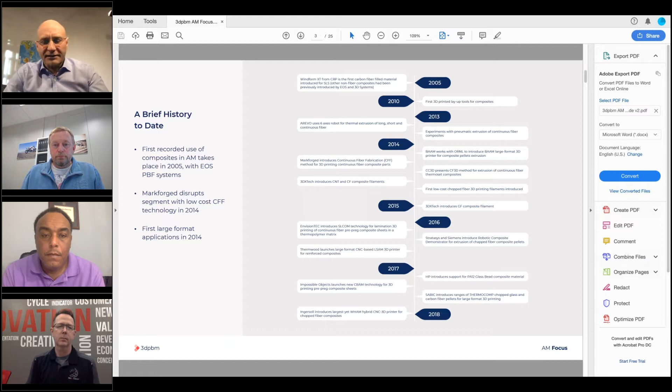A very quick view at the timeline for adoption. The main points are that through 2019, the market is almost entirely based on chopped fibers for material extrusion and powder bed fusion technologies. We believe that through 2022, we will see greater adoption of large format and pellet-based extrusion technologies for very large applications, meaning a lot more material consumption. And then we don't expect to see continuous fiber applications in additive manufacturing until after 2023.

This is to give you an idea of the overall market forecast. The main segments are hardware and parts. Material is a smaller segment. It's very interesting, but the point here is that the value is in the composite additive manufactured parts. That's where a lot of the added value is.

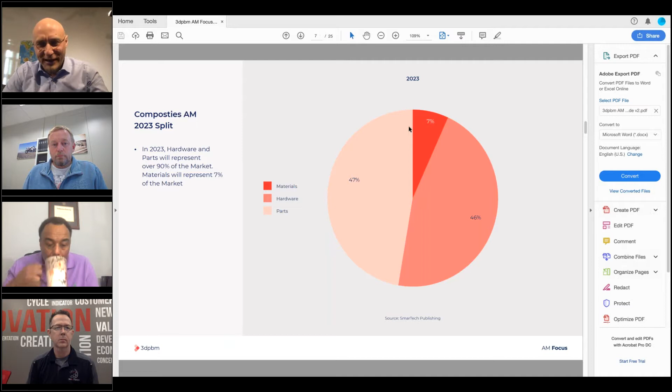As far as the hardware, these are the technologies we see as most highly relevant. Filament extrusion is most commercially relevant, such as what we're going to hear from Matt at 3DX Tech. Robotic extrusion, as we're going to hear from Arevo Labs, and the CFF from Markforged is quite relevant. Large format technologies using pellets are very relevant, and powder bed fusion technologies, including Multi Jet Fusion from HP, which only uses glass bead composites at this time, is also interesting because of the high productivity rates.

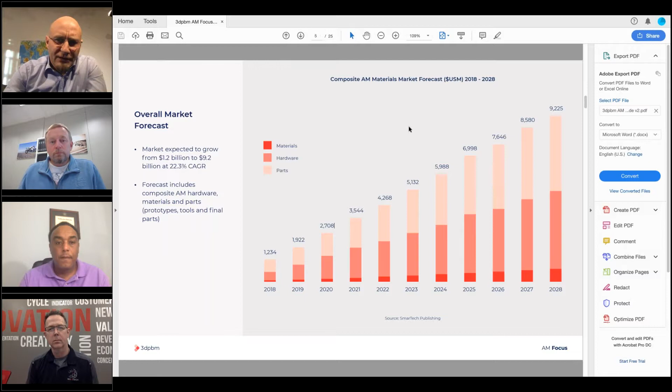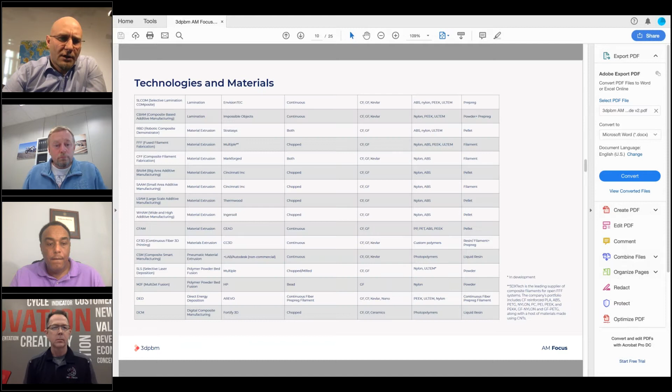This is once again the overall market forecast. Let me just go on to... so this is just the technologies, and okay, so let's look at the hardware for one second.

As you will see in this chart, by far the most important revenue opportunities are represented by polymer powder bed fusion technologies, but we have to specify that this includes all powder bed fusion machines, because there are no dedicated powder bed fusion systems for composites. So it was difficult for us to split. While there are filament extrusion dedicated systems, there are not that many powder bed fusion dedicated systems - in fact there aren't any. So this includes all powder bed fusion systems.

We do expect that powder bed fusion systems will become very important adopters of composite powder materials.

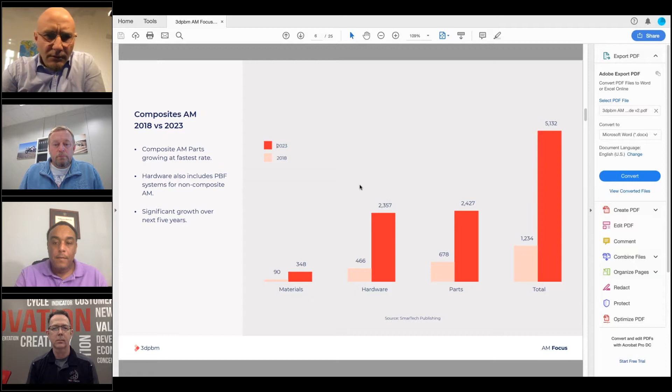Sorry, I don't understand why this is going back. Okay. So...

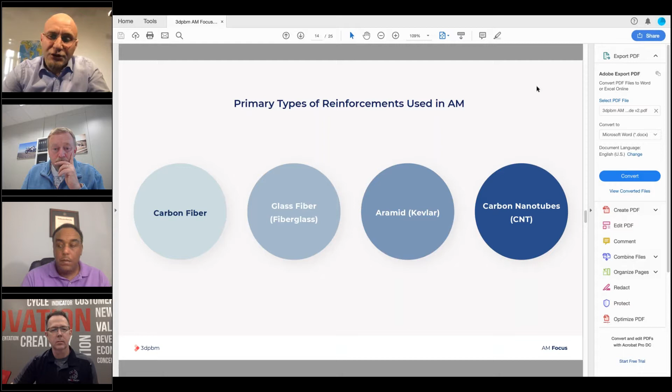So which materials are we talking about? In particular, the primary reinforcements used in additive manufacturing are carbon fiber, glass fiber (known as fiberglass), some cases of aramid fibers like Kevlar, and carbon nanotubes. These are the materials that we believe have the most commercial opportunities available.

How are these materials split? This report focuses specifically on chopped fiber composite materials for thermal extrusion and laser fusion, so powder bed fusion technologies. There are some cases of thermosets being used in additive manufacturing, but those are mostly experimental technologies without a very relevant commercial application at this time.

I think the most interesting segment as far as variety of materials available is material extrusion, where we see materials being used both in the form of pellets and filaments. In both cases, they can be reinforced with carbon fiber, glass fiber, and carbon nanotubes. We see cases of this being commercially available. We also have a number of plastics being used, ranging from ABS and nylon - more basic plastics - to now increasing use of high performance plastics such as Ultem and PEEK.

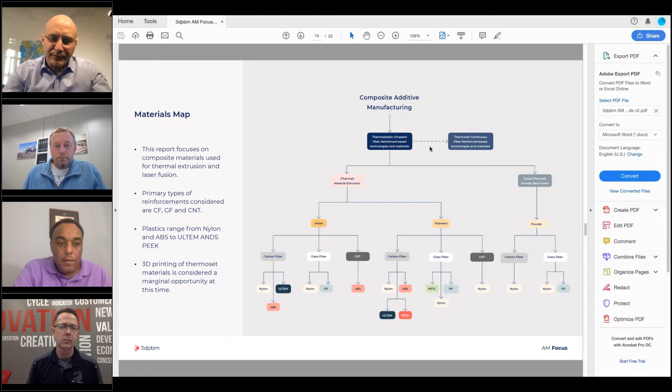In laser fusion technologies, we see mostly powders as the support material, and there are a lot of examples of carbon fiber and glass fiber being used in powder bed fusion, almost exclusively with nylon. We've also indicated some polypropylene being used, and there are reports of other more high performance materials that will be used in powder bed fusion as well.

This is the split. We do expect that pellets will be the most common support because of the high throughput capabilities of large format technologies which use composite pellets, and because of the specific benefits that composites bring to large format 3D printing. Filaments are a smaller segment because it's a slower technology, and powders is quite a significant segment because it's much more established in the market today.

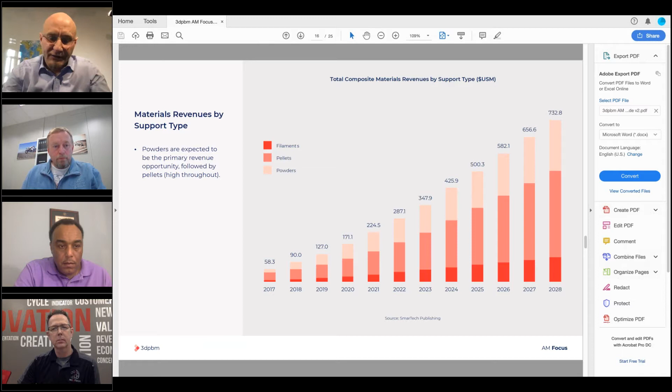This gives an idea of our forecasted CAGR for each material type. The most growth is expected in filaments and pellets, while powders is a more consolidated segment.

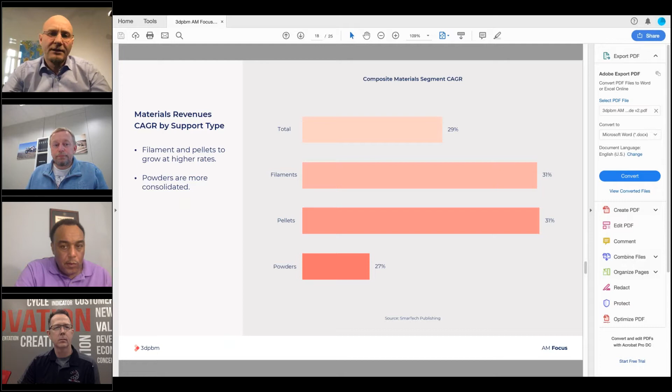This is the adoption segments, which is also quite interesting. Automotive and aerospace are the most interesting single adoption segments, but the other industry segment is a lot bigger. This includes energy adopters like oil and gas, and marine adopters - companies that use very large parts. The larger part capabilities that we're starting to see using composite materials will bring increasing use from these adoption segments.

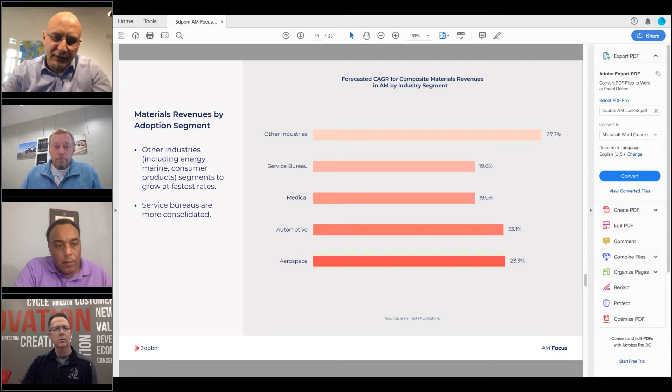In this report, we also took a closer look at 3D printed parts. Composite AM parts are expected to be a very significant revenue generator - we expect them to grow into a $4 billion yearly revenue opportunity.

Final parts are expected to become the most significant segment. Today prototypes and tools are more significant in terms of revenues than final parts, but we expect that by the end of the forecast period, and even before, final parts will become the most important segment because of much higher numbers - reaching 1.8 billion dollars.

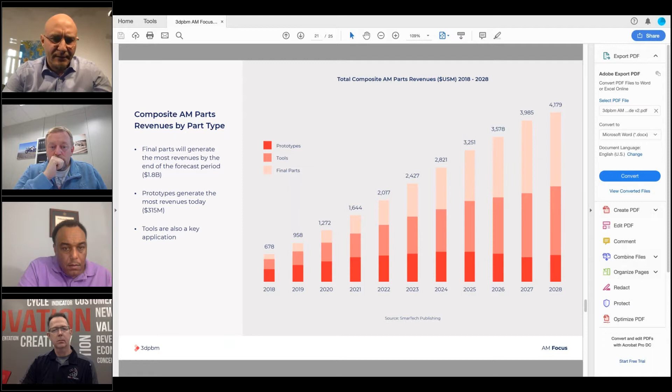Prototypes are the biggest segment today. We estimate they're worth about 300 million worldwide.

This is also a more in-depth analysis of the parts - the types we considered: small, medium and large prototypes. For each part type we considered a different size to make our calculations.

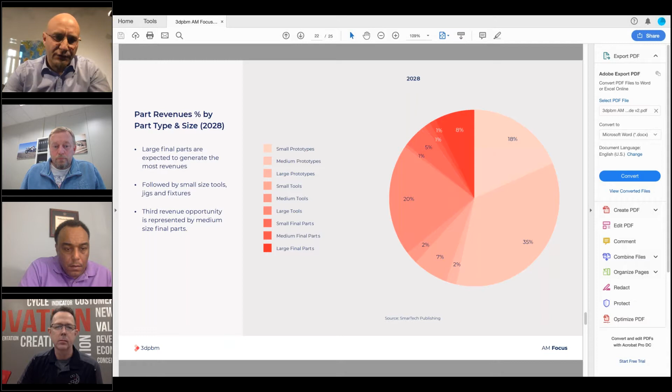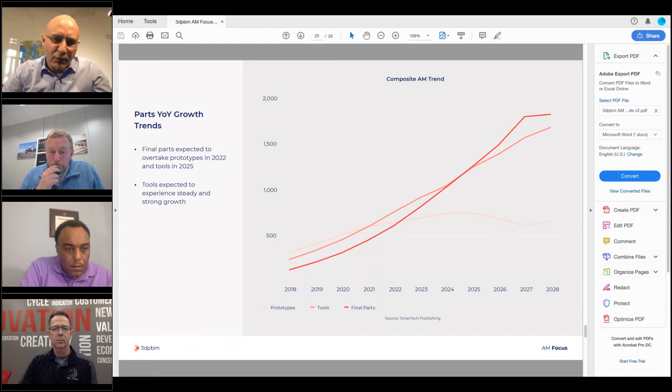One last chart to highlight growth: final parts are expected to overtake prototypes around 2022 to become the most important revenue segment. Final parts are expected to have the highest growth rate at 30%, followed by tools, which we believe will be a very important opportunity for composites because of several cases we're observing now.

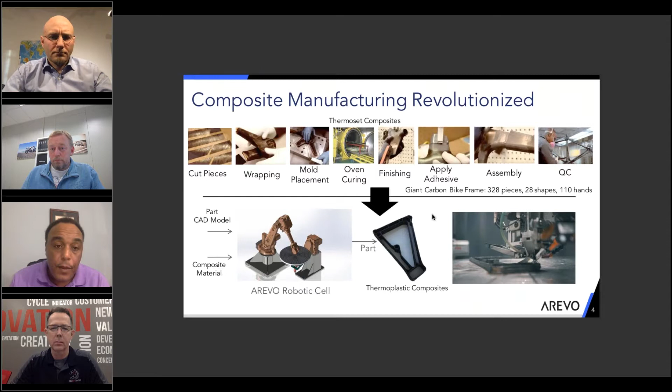So AREVO's approach is software, materials, and robotics. Our workflow starts with the software, which takes a digital design, analyzes it, and looks for strengths and ways to reduce the weight of the structure. It does an analysis we call additive finite element analysis, or FEA. We threw away the traditional laminate theory approach used to make composites and tailored the approach for additive.

Every single fiber is oriented to get the desired material property. We're able to predict, simulate, and optimize the material and fibers to get maximum performance. The composite materials are also optimized for this process. Today we're using a thermoplastic and continuous carbon fiber.

The robotics platform is based on what we call DED, direct energy deposition, which employs a laser that melts the incoming filament and the substrate below, applying appropriate pressure to produce in situ consolidation. Our properties are comparable to autoclave properties common today with composites, and the subsequent properties are 5x the strength and 1/3 the weight of titanium.

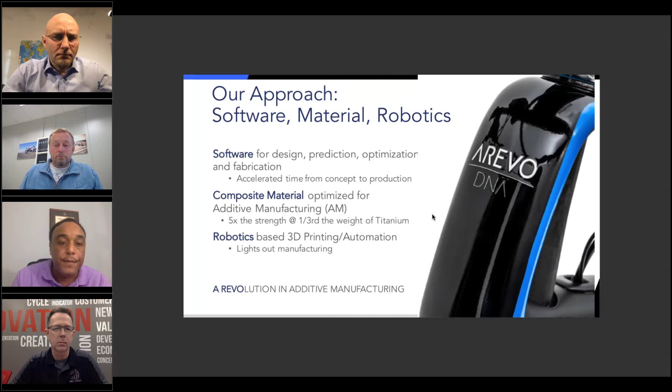Our manufacturing approach is really revolutionizing the way composites are done today. As I mentioned earlier, composites are very labor intensive to produce in the traditional method. With AREVO's manufacturing cell, we consider it a lights-out operation, a factory-in-a-box philosophy.

We take an AREVO robotic cell and integrate it with quality control. As we lay down every single layer, a digital image, a digital twin of every single layer, is created to build a representation of the part that we're able to simulate, understand, iterate, and continue to improve.

This is new for composites, new for aerospace and automotive parts. Today, you traditionally have to take a finished part and go through some sort of X-ray to understand residual stresses and micro cracks that may be present. With our approach, we're capturing this data during the buildup of the part.

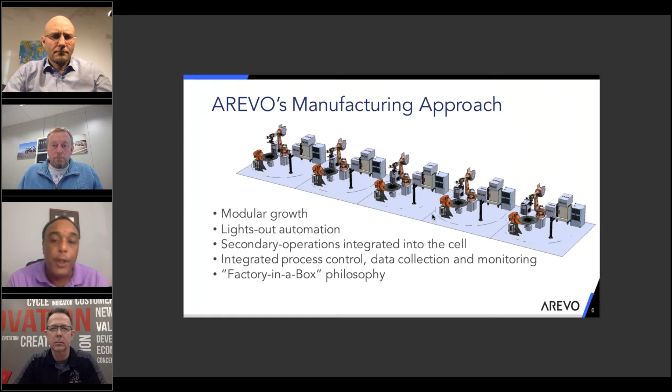The benefits of this approach are a strength to weight ratio comparable to high performance metals—lighter and stronger—at a quarter of the cost of traditional composites.

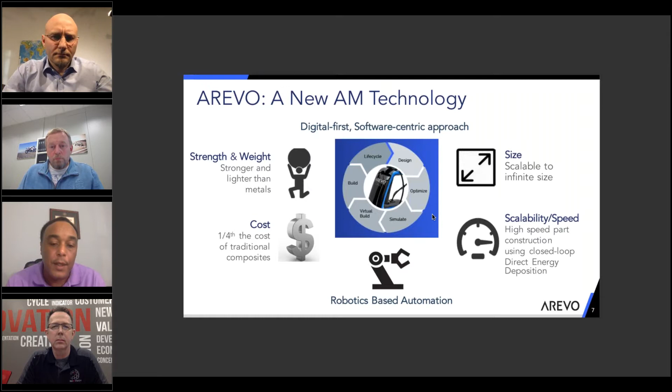When you look at the build envelope of large format composite systems, our approach is very scalable. As you need a larger part, you can essentially put a robot on a gantry. Since we're robotics based, it's an infinite build volume, and from a deposition throughput standpoint, we're much faster than any commercial FDM-based extrusion system. This is key to enabling new business models and going after applications that weren't possible before.

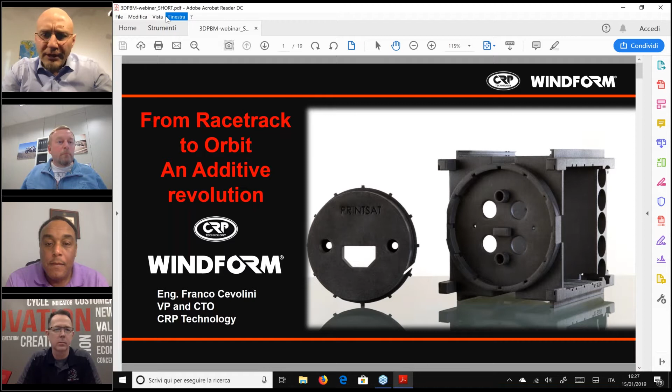Yes. Okay, so I will speak about the use of Windform materials in CRP technologies. As you can see here, it's something that started with the racing application and now is also available for aerospace application.

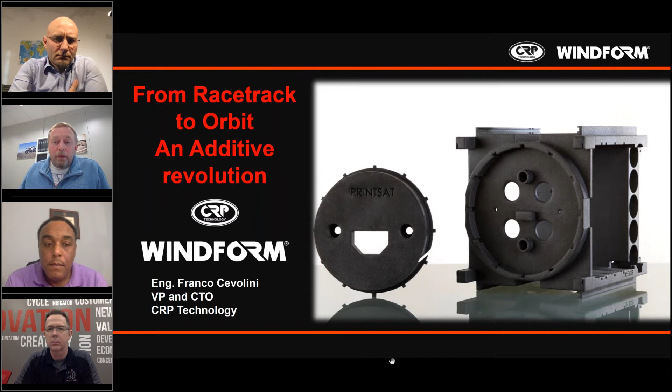As I said before, we started with motorsport because of where we are located. We are located in Modena, the motorsport Italian Valley. So a lot of application started with this final application, this final market in mind. But then after the motorsports, we were able to...

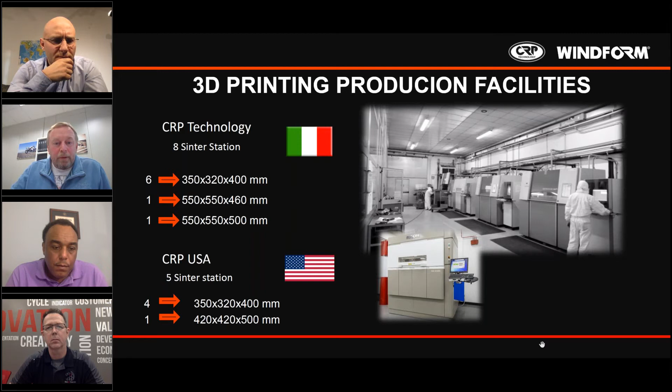What is important to highlight is that using the Windform material, we were able to go from rapid prototyping to additive manufacturing. In fact, with these materials, we are now able not only to produce functional prototypes, but also final parts. So now we can call this a real manufacturing technology.

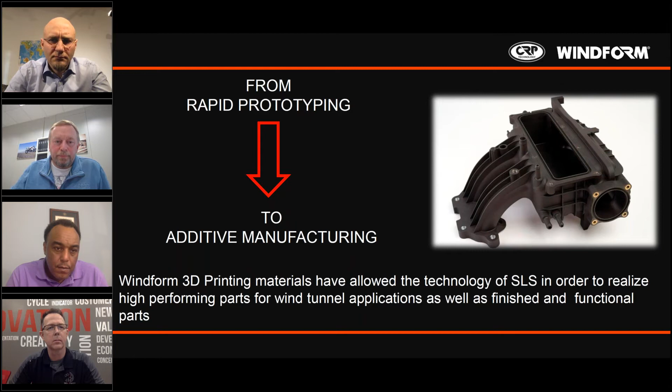We started in 2005 with the first release of Windform XT, a nylon-based material reinforced with short carbon fibers. After 10 years, we released a second version, Windform XT 2.0, again a nylon-based material reinforced with carbon fibers, where we were able to improve the mechanical properties and also the thermal properties, which were already quite high.

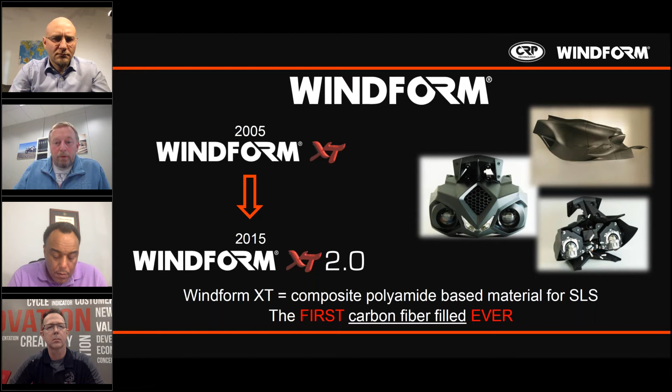Now we also have another version of carbon fiber reinforced material, the Windform SP. In this case, we preferred to improve the toughness and resistance, and this material is also waterproof, so it's used for applications where it's very important to have resistance to liquid and gas.

These are the two top-level materials. As you can see, we have a very high tensile strength and also a very high tensile modulus, which is very useful. And we are talking about a very light material, because the density is close to 1.1.

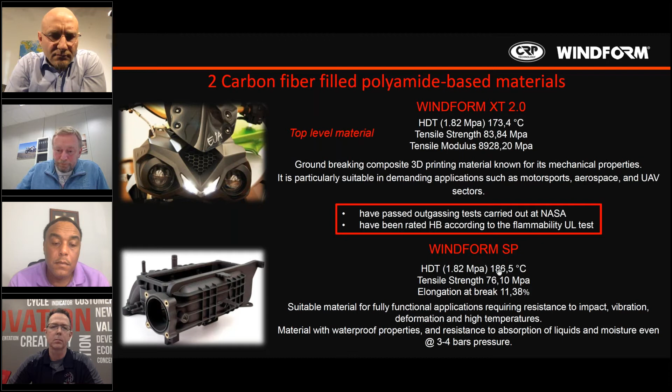Now we also have two versions reinforced with glass fibers. This is quite unusual, because normally glass as a reinforcement for SLS technology is used in the form of beads, not fibers. But with this choice, we were able to improve the mechanical properties, and also the thermal resistance of the material. Most importantly, talking about electric applications, these materials are insulating, so we have no electric conduction.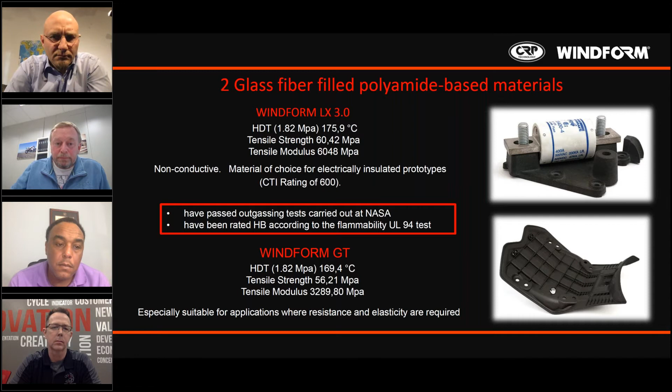This is what I have already said. It's important to underline that all the bikes will be Energica bikes, and we were selected among other big names in the motorbike scenario.

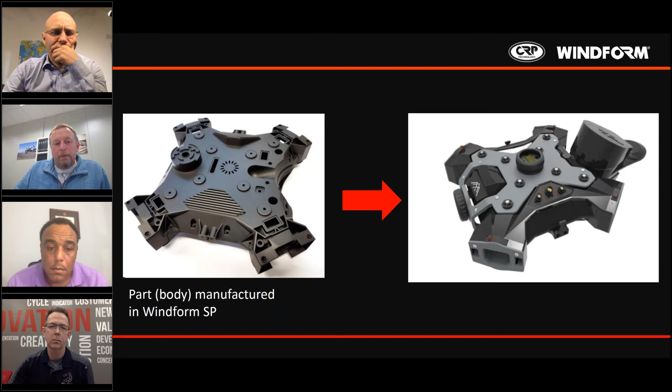Here, a very nice project that we have done one year ago. This is a drone that is completely done using Windform XT, Windform SP, and also other types of Windform material. This is the main body, so the frame of the drone. These are the arms that are manufactured in Windform XT 2.0.

The body is in Windform SP. So again, we are able to select the right material in order to take the most advantage for the final part.

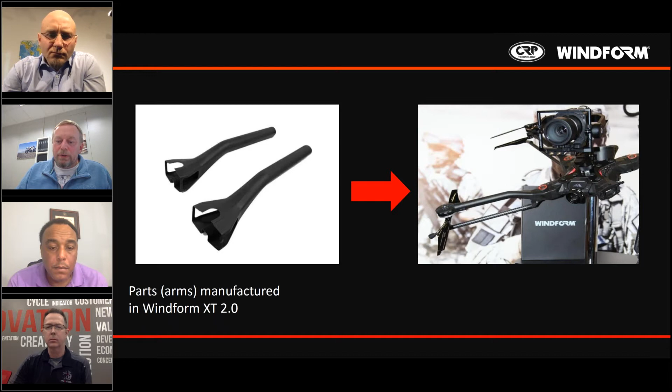And this is another very interesting application. Here we are talking about aerospace. Our materials are approved by NASA and ESA, in order to be used in space. So in this case, we are able to save a lot of weight and also save space, because you can take the advantage of modeling what you have to produce using the 3D printing technology.

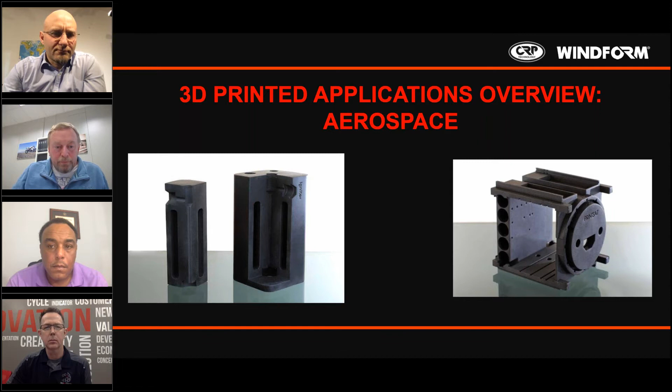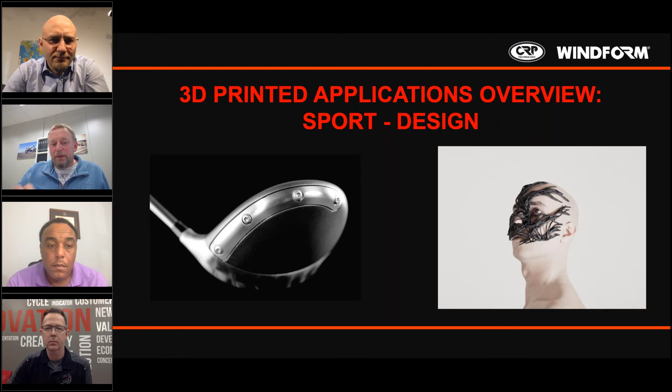Here we have some sport applications. Golf club head. To be honest, here we have several technologies that are combined together, because we have the body that is done in Windform SP, but we have also the impact face that is done in titanium machined from solid by CNC, and also other parts that are CNC machined and then connected together.

And this is a medical application, so we are talking about orthotics, and again, very useful because this is a clear example of custom production. So these are parts that are just dedicated to the single person in order to help them in what they have to do every day.

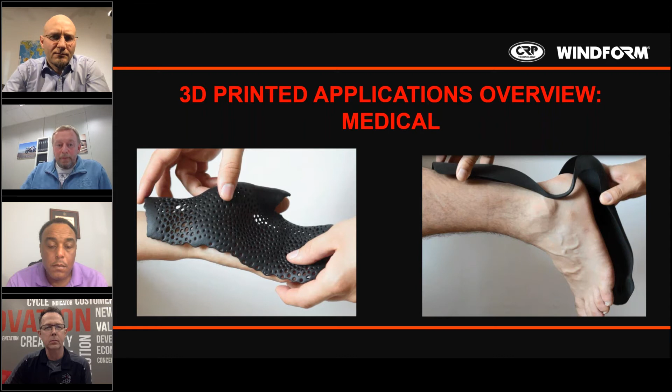So thank you for your attention. Sorry for the mistake in the middle of the presentation.

Thank you very much, Franco. That was great, and I think that helps demonstrate the variety of applications that you can produce using powder bed fusion. Helps to kind of support our analysis that it is going to be a very big business opportunity. I think my personal opinion, before we move on, is that...

There is an additive manufacturing technology for each segment. Each additive manufacturing technology has its own segments and its own very significant growth potential in its own areas of application. So obviously for powder bed fusion, you have certain applications, and for, as we saw before, robotic deposition, even with composite, with continuous fibers, there is a wide number of other applications that will come.

And now we're gonna introduce our speaker, Matt Howlett, to look at the opportunities in terms of filament composite materials. I think once again we're gonna see very different applications, but very interesting potential. So let me pass the controls over to Matt.

Just one second, and here you go. Matt, you have the controls now, so feel free to start the presentation. That's great. Thank you, David. Can you see my screen? Yes. And so the first page of the presentation? Yes, I think you might want to make it full screen, but we see the first page. Oh no, it was full screen. My bad. Sorry. How about okay, that? Is that all right? How about this? Oh, good. Okay.

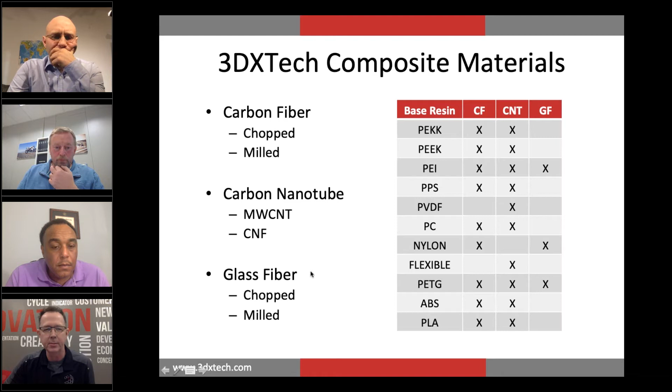Each one of these are materials that we've developed and launched, and in each one you'll see a little bit different type of carbon fiber material for the type of application they're going to. Composite materials have been a major part of what we've done since we started in 2014, and that segment has really grown and taken over as the overall revenue driver in the business as we've continued to grow year over year, whether it be glass fiber, carbon fiber, or nanofibers.

Why we see that is the onset of adoption primarily in industrial and aerospace. The lower cost, consumer grade materials have always been popular and sell well, but industrial and aerospace customers are starting to really come on over the last year and a half, because there's more enabling technologies.

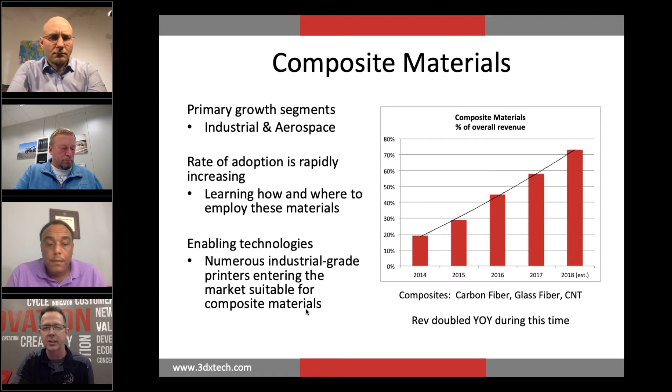These are mostly filament fed, and they can be on a $1,500 printer all the way up to a $100,000 printer. More and more printers are coming into the space that can print PEEK, PEKK, and Ultem carbon fiber grades, and that's enabling companies to find new spaces for these materials in their organizations. Now we have many customers with 15 and 20 factories, and they have cells in each one producing tooling and end-use parts using our materials, because they've finally figured out ways to enable their local end-use customer groups to utilize these in-plant.

Here's a couple of pictures of areas we try to focus on: higher temp, higher chemical resistance, higher mechanical property applications, both when we're printing them or developing materials for these markets. My background particularly is in high performance materials for many years before this, so that's the area we try to focus on—moving upline in terms of temperature and chemical resistance.

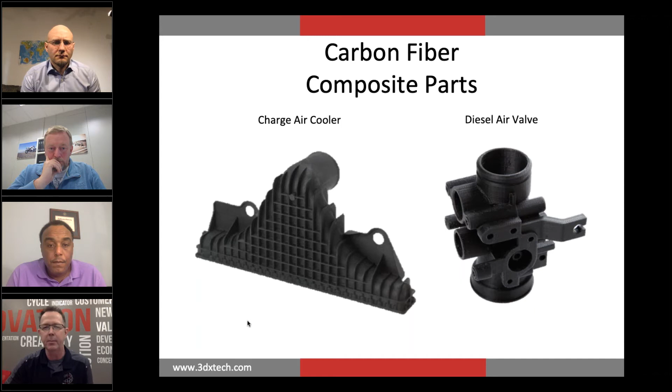What I mentioned earlier about carbon fiber, the next couple of slides go to—it's kind of a pet peeve—people always ask, what percentage is your carbon fiber? That's not really the right question, because we take a different approach to the addition of carbon fiber into our polymers, based a lot on customer requirements and what the market will bear for the given level of performance. Consumer requirements are really cost then performance, industrial grades are performance and cost, and for our aerospace customers it really comes down to performance. For each segment we have different materials and carbon fibers we employ to satisfy those needs.

The fiber sources we have access to and utilize are what's considered in the market small tow and large tow—aerospace grade 24K or 12K type carbon fibers that we use in some of our more exotic materials like PEEK, PEKK, and Ultems. The large tow, industrial grade 50K carbon fibers, are typically used in, let's say, polycarbonate and below—something a little more price sensitive, but these fibers work very well for that.

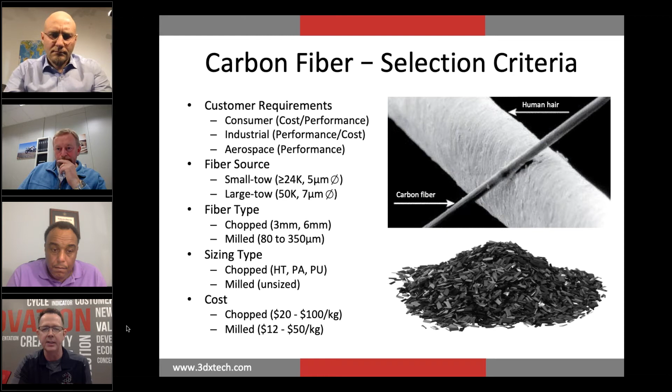We have grades that cover the gamut on all these, so I want to make sure that carbon fiber, it's not just carbon fiber. That's why I put this slide together, which kind of explains a little bit of what we do and why we do it.

Compare that to the two carbon fibers, the 50K or the industrial grade carbon fiber. It's a smaller diameter and significantly stiffer, and even smaller diameter, 5 microns, and about almost 300 gigapascals for the aerospace grade. Where this comes into play is not just cost, and so the next slide you'll kind of see the difference.

If somebody says, hey, you're using 15% carbon fiber filled PEEK, some of this has to do with not just the percentage of PEEK or carbon fiber you're using, but also which type of carbon fiber. If you're using a stiffer carbon fiber, such as the 24K intermediate modulus aerospace grade, versus somebody else using an industrial grade 50K...

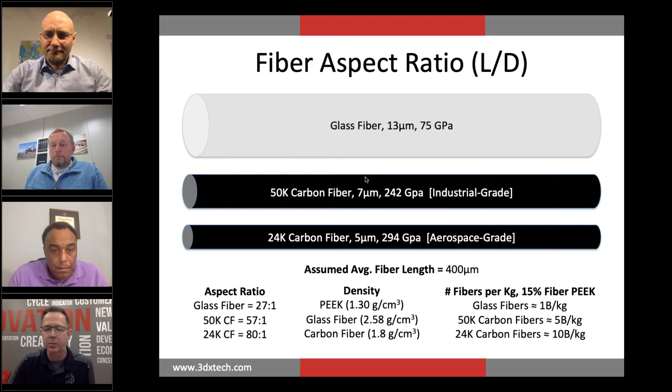So with the term carbon fiber, not all fibers are equal. We do a lot of work with the different materials to make sure we're selecting the appropriate material for the appropriate end use application.

How we validate whether or not some of this is working is we go through a lot of work and then select competitors' materials, whether it's different PEEKs, different PEKKs, different nylons, and we print a lot of ISO bars here. So we're always validating what we think we're doing is appropriate for the end use.

Here's a good example of Markforged's Onyx product versus our CarbonX. I think some of the work that we do on the carbon fibers, compatibilizing and mating them to the right polymers, kind of shows in the end use.

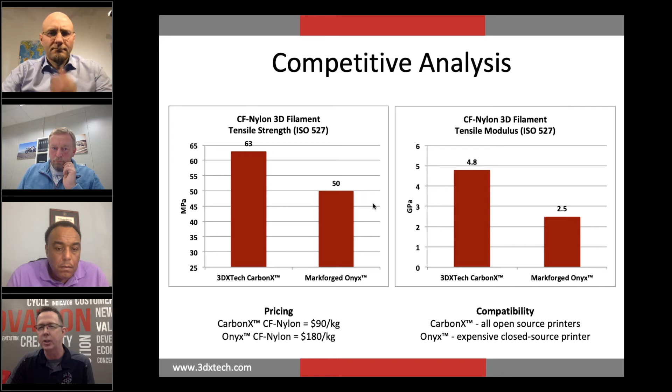And that's it. I just wanted to do a little deep dive into the different types of carbon fibers that we use, and I guess we can open this up to questions a little bit.